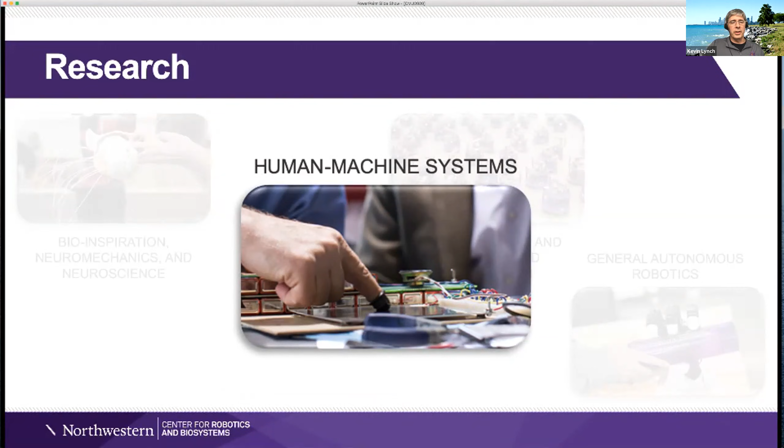So I'm going to just give you a brief flavor of some of the work that we do in collaboration with the Shirley Ryan Ability Lab, specifically in functional electrical stimulation for neuroprosthetics. So you know what a prosthetic is. It's typically a mechanical device or arm, and you attach it physically to your body and you control it either through mechanical means or some other electromechanical means.

Well, a neuroprosthetic is for somebody who doesn't need the external structure of a prosthetic arm, but has lost the capability to control it due to perhaps a spinal cord injury.

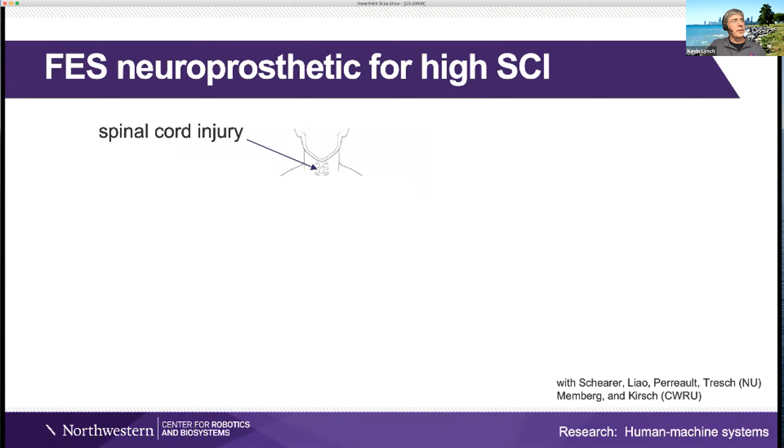So for the neuroprosthetics, what we're looking for is a way to replace the lost connection from the motor cortex to the muscles that command the motion of the arm. So if you suffered a spinal cord injury, that connection has been lost. And so what we want to do is use a brain-machine interface to basically determine the user's intent, and then also find a way to straddle that lost connection by performing a surgery.

So this is with our colleagues at Case Western Reserve University, where we implant a stimulator pack in the abdomen of the subject and use stimulators to stimulate the muscles or the nerves that go to the muscles of the shoulder and the back and the upper arm. So the idea is that the user thinks about something and their arm reaches out to accomplish the task.

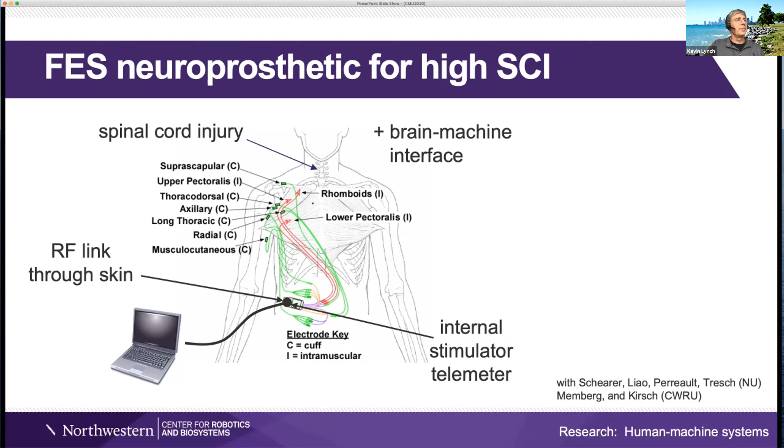So this is the experimental setup. So this is a big group working on this project. Some people were focused on the brain-machine interface. That was not my piece of it. My piece of it was on basically system ID from the muscle stimulations to the motions of the arm, and then how to use that for control.

So the experimental system we have here, the subject will be seated and connected to a robot. The robot has a force torque sensor, and we can use that robot to drive the subject's arm around and measure forces so that we can get passive arm dynamics. And then at the same time, we can stimulate the muscles and then determine how the dynamics have changed due to the added component of forces at the joints.

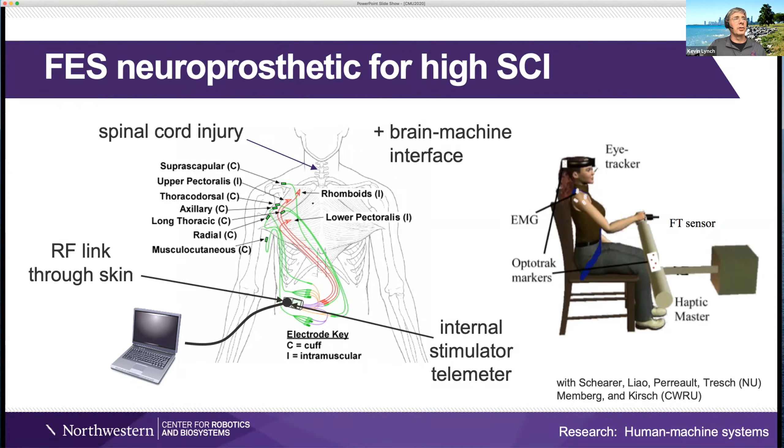So we're trying to determine a model of how stimulations create forces and torques at the joints, and then what the arm dynamics are so that we can use that for control. So I'm going to skip the details, but like I mentioned, we're trying to learn this mapping from stimulations to muscle forces. And then we're also learning a semi-parametric representation of the arm dynamics, where we have a very simple model of the rigid body dynamics of an arm.

And then we add to that basically Gaussian process models to correct for residual errors that are not captured by the model. So a low degree of freedom model so that we get 60% of the way there to the dynamics, and the Gaussian processes to correct that.

So this is a video of an experiment. So right now the subject, she's had a high spinal cord injury due to a gunshot wound. And what we're doing here is we're basically driving her arm around while also stimulating the muscles so that we can determine what the passive arm dynamics are and what the muscle contributions are. And this is just one particular trajectory that you're seeing here.

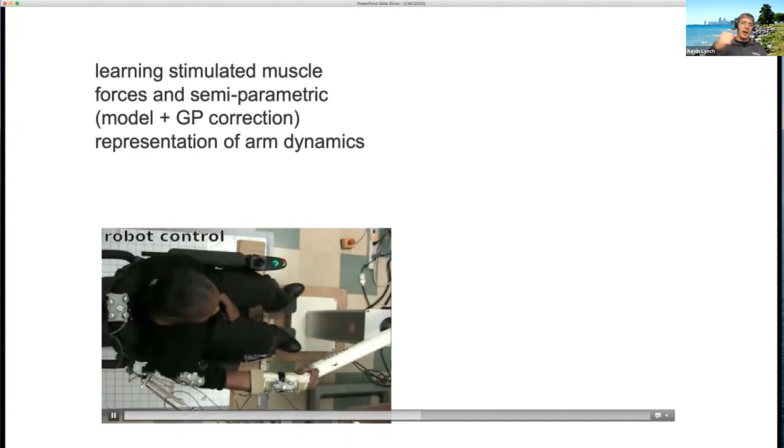After doing this, after moving the arm around in a variety of ways and stimulating the muscles, then we can build a model and we can invert that model for control. So now what's happening is we have this inverse model, we are commanding how we want the arm to move, and it's spitting back to us the stimulations that we should be applying to the muscles to cause that motion.

What's happening right here is the robot arm is in free mode, so it's not assisting in any way. It's just trying to apply zero forces. And then if we disconnect the robot arm completely, this is the motion of her arm in response to the stimulations from the model that we've built.

Okay. So this is still very crude, and there are some issues with the system. In particular, the servo update rate is only 13 hertz. So 13 times a second, we're able to sense where her arm is and then apply a new stimulation to the muscles. And that was partly chosen due to maximizing the muscle forces that we can get, and also to prevent pain, because even though she is unable to actuate her arm, she is still able to feel some pain.

So all of these things create challenges, and this is still an early result, but you can see that the model that we've learned allows her to move her arm from stretched out to close to her face for perhaps a feeding action.

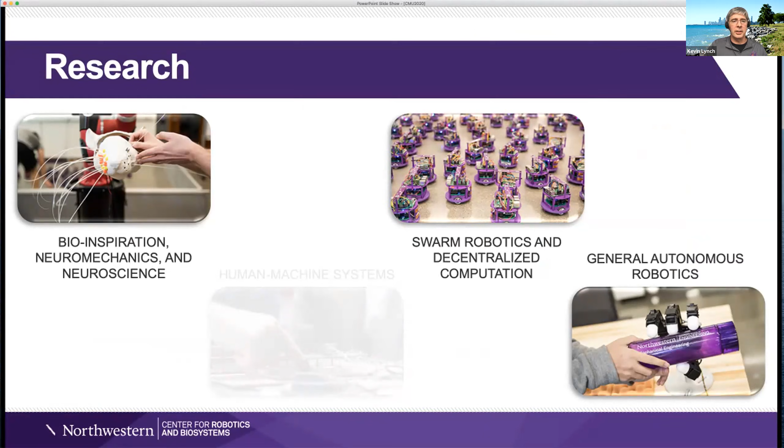Okay, so I just mentioned that as one example of our collaboration with the Shirley Ryan Ability Lab, but most of my talk today is going to be talking about robot locomotion and manipulation. So this is joint work with Dan Lynch and Paul Umbanhowar, and Dan is no relation. He's our PhD student. And here's an example of locomotion on yielding ground.

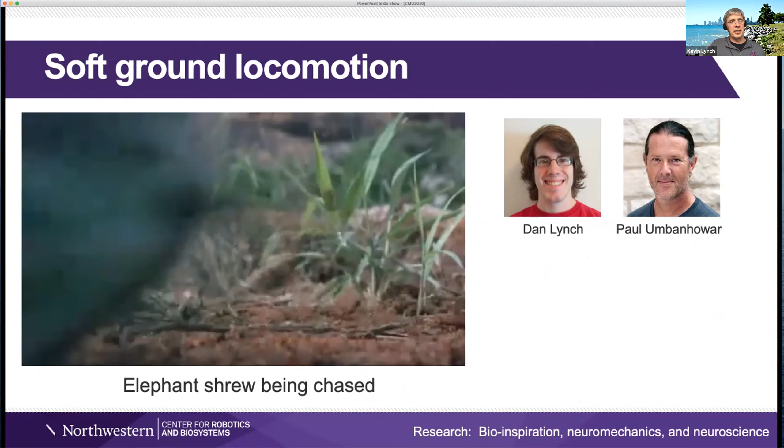So this is a rodent being chased, and you can see here as it's escaping, when it pushes on the ground, the ground gives way. So the thing that we're interested in is how can you do efficient locomotion over yielding surfaces? So here the elephant shrew is just trying to escape, so it's not worried about energy efficiency.

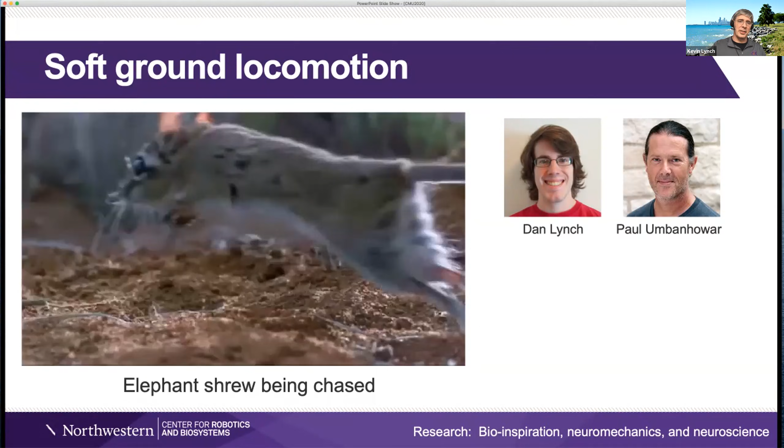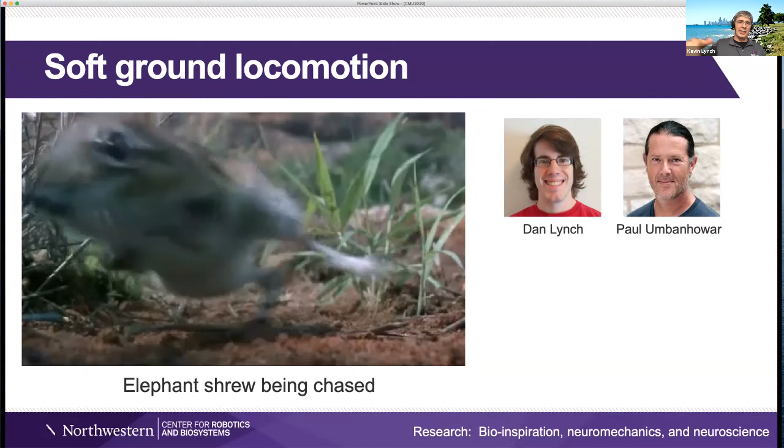But if you think about long-term locomotion over sandy surfaces, or if you think about yourself walking on the beach, if you walk down near the water where the sand is packed tight, it's much easier to walk. If you get into the loose sand, then you're using a lot more energy.

So the question of locomoting on yielding ground led us to this problem formulation that we called the soft landing problem. If you deform the ground, you're not going to get that energy back. Any of the work that you lose to pressing the ground down is not going to spring you back and be returned to you. So if you want to do efficient locomotion over soft ground, you might want to minimize the deformation that you're creating.

So an even simpler version of that is, what if you're falling into the ground? How do you control your muscles, or how do you control the robot so that your penetration into the ground is as little as possible? So we call that the soft landing problem.

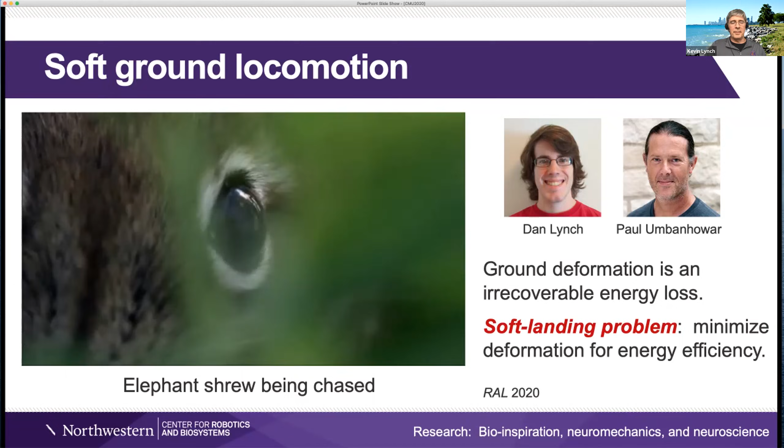So here's the very simplest test bed that we could think of to start to get at some of the fundamental questions of how to land on soft ground without wasting energy. So imagine now that you have a body that's just a mass, a foot that's a mass, and they're connected to each other by an actuator. And then they're impacting the ground, and the ground we're going to model as a one-way spring.

So basically, the deeper you press into the ground, the more force it resists you with. But once you start to lift up, the ground does not spring back. So you're basically losing all the energy it takes to compress the spring and never getting it back. This is a fairly simple model of soft ground deformation, but has been shown to represent first order effects for many typical sorts of soft grounds.

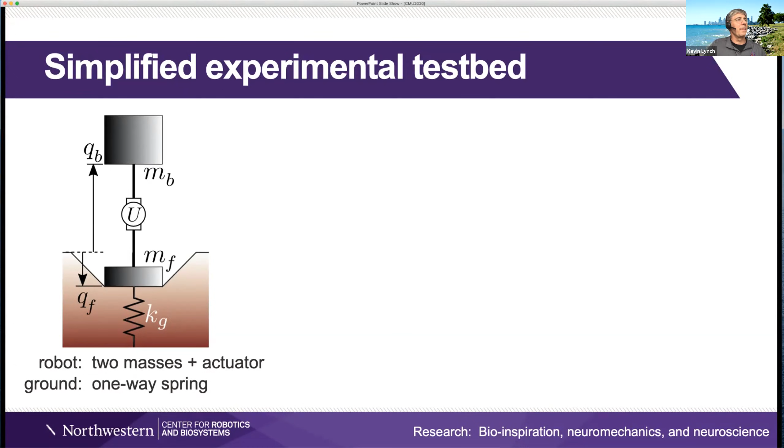So here's a picture of the experimental setup. The body is just the stator of a linear actuator, and then the linear actuator is pounding the foot into the ground. And then we mount it all on a guide rail so that we keep the motion one-dimensional. And then there's a lift mechanism so we can lift up the robot and drop it.

And this is just a video of that robot hopping. Okay, so the video that you're seeing here, you can see it's already dug itself a hole. The ground has become fairly compressed, become more like rigid ground. We're more interested in what happens when the ground is still soft.

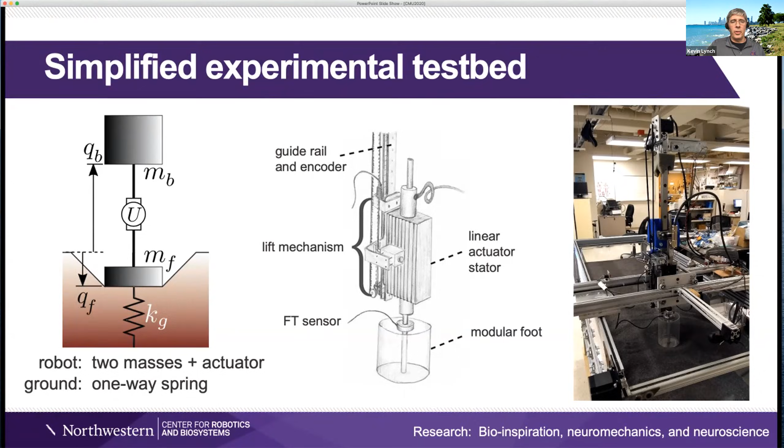Okay, and we also want to be able to control the stiffness of the ground. So for that, we have this air blower system, and let me show you here. So here the poppy seeds that are making our virtual sand are being blown from below by a fan that is blowing through a diffuser, and it creates this uplift on the sand so that it settles back very loosely.

And when the sand is packed very loosely, the stiffness of the ground is half of what it will be compared to what you saw in the previous video when it gets pounded down. So we can control the stiffness of the ground to about a factor of 2.

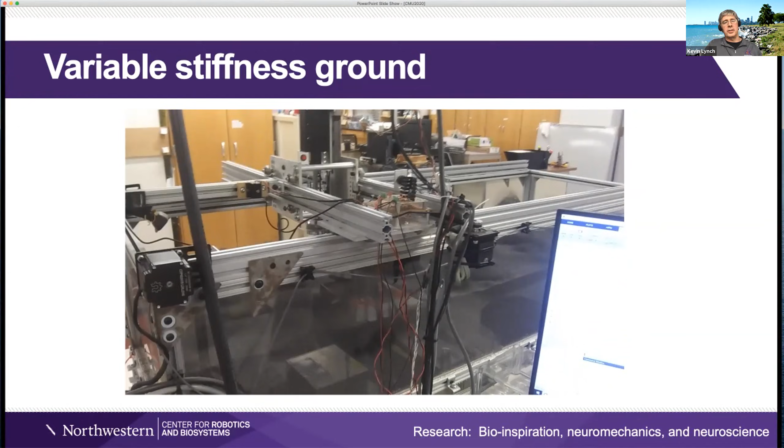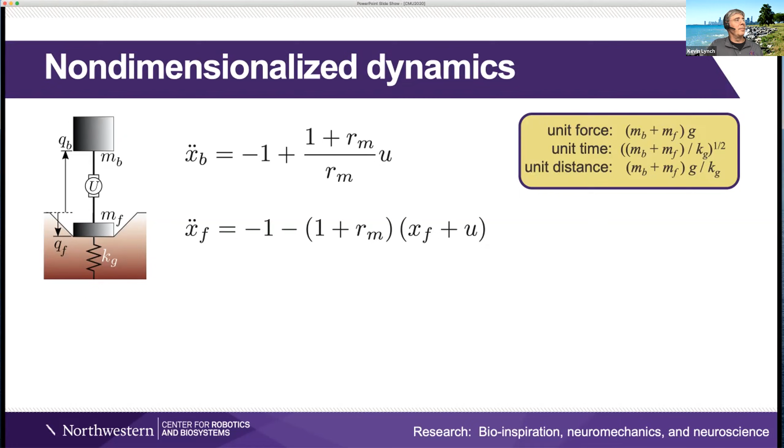Okay, so simple dynamics for this robot. We're going to define a unit force, which is just the total mass times the gravitational constant, a unit time, and a unit distance. And once we've defined these constants, the equations of motion become very simple. Right? So we have the dynamics of the body of the robot and the dynamics of the foot of the robot. U is the control force that's being applied. And the units of U are basically M times G.

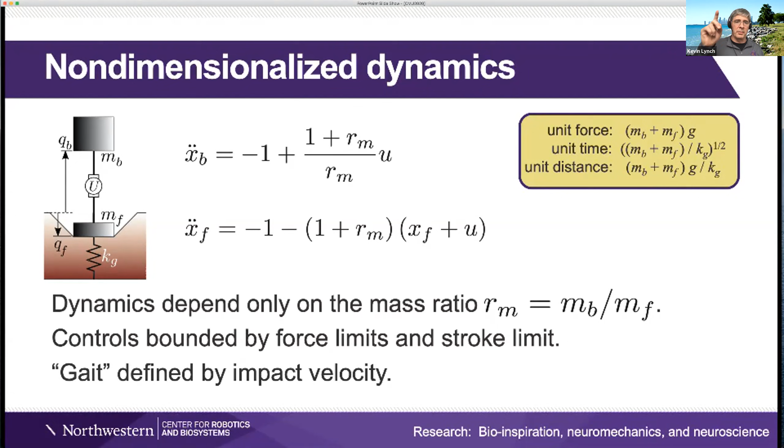So in these simplified dynamics, they only depend on the mass ratio between the body and the foot. The controls that we apply are bounded by the force limits that the actuator can apply and also the stroke limit, right? So it matters a lot how much stroke you can get out of the linear actuator when you're trying to land softly. And for us, the gait of the robot is only defined by how fast it's coming down when it hits, since it's just a one-dimensional hopper. Okay, so the problem we want to solve is how do we minimize the penetration depth subject to control and stroke bounds on the foot?

Then you lift up on the foot so that you stop its motion downwards. And then you apply a downwards force over this long period that's just the force that you need to keep the body at a stationary height above the foot. So that's it. That's the optimal thing to do if you want to minimize your penetration. Stomp into the ground to the right depth and then just sit there while you slow down the mass of the body.

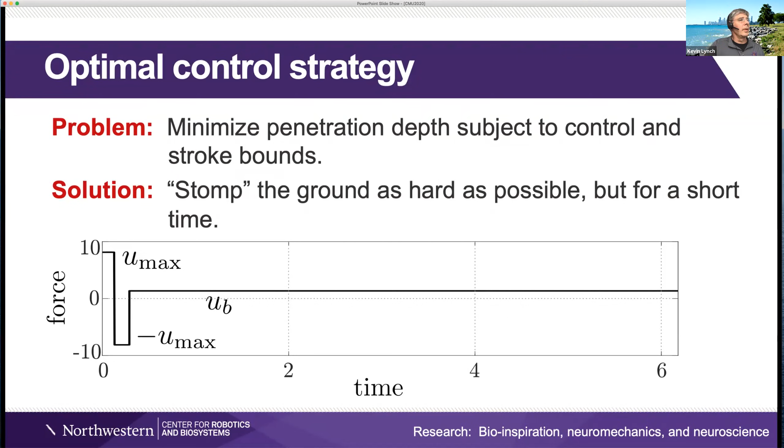All right, so good thing is we found the optimal solution. The bad thing is that if you try to use this kind of bang-bang optimal control, first of all, your control is discontinuous. You're changing the forces instantaneously. And secondly, this behavior is sensitive to initial conditions. So if you're not coming down at 5 units of velocity, but 6 units of velocity, then this kind of solution might give you bad response, bad behavior.

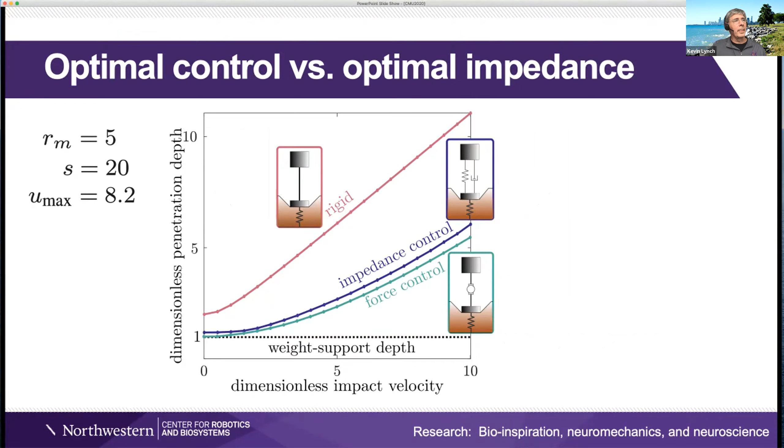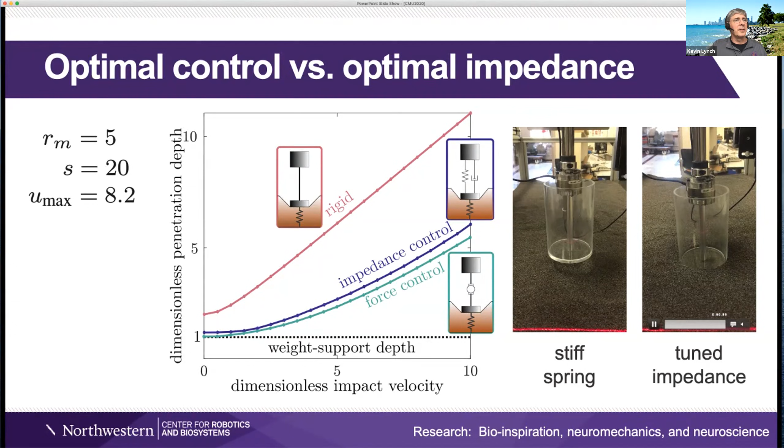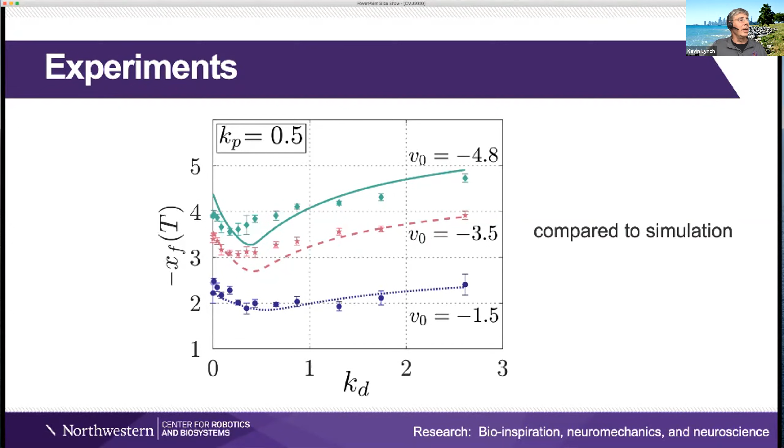Next steps for this, we've got a multi-degree of freedom quasi-direct drive hopper that we're going to be using for locomotion in the sandy testbed that I showed you earlier. So these initial experiments are about understanding how to do good impedance control and interacting with soft surfaces.

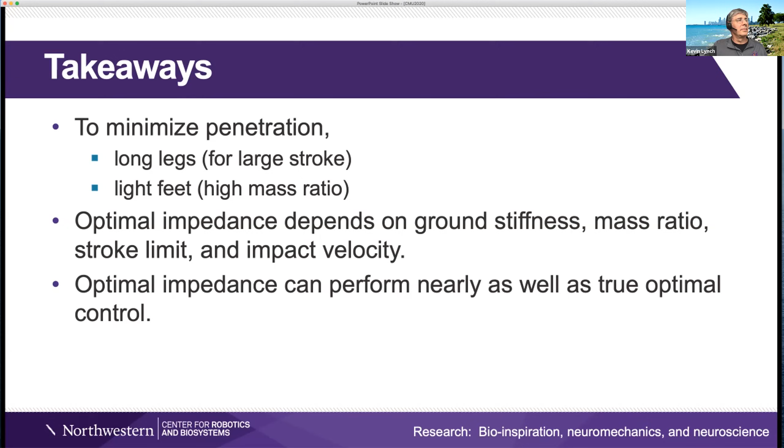Okay, so let's talk a little bit about non-prehensile manipulation, and in particular, contact juggling. So again, this is something that I learned from Matt many years ago. Contact juggling is best explained by demonstration, and I can't do it, so I'm going to show you a video.

Here's a guy in Taipei showing us how he can manipulate these crystal balls, mostly without ever grasping them. Okay, so that's why we call it non-prehensile. How to control the motion of an object without achieving a form or force closure grasp of the object.

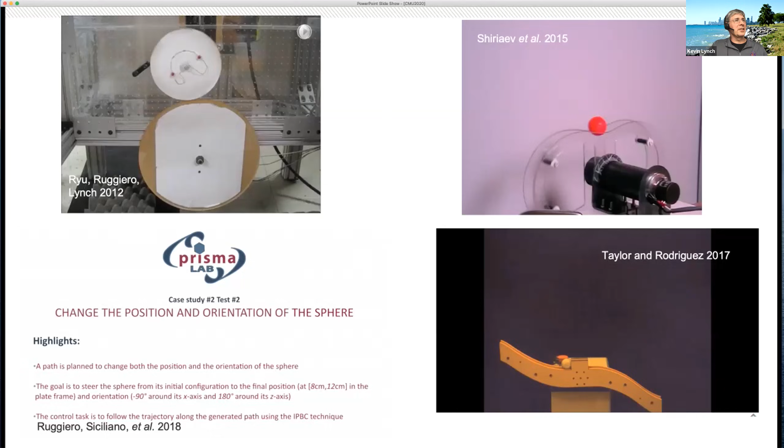So here are some examples from the robotics community. So maybe down here on the left is the only three-dimensional example you see up here. So this is some work out of Naples. And they're showing us how they can control the position and orientation of a ball on a plate by carefully rolling it along a pre-planned path. You know, the idea is, how do I get it to the right position and orientation relative to the plate?

And up here you can see some planar examples where we're controlling the motion of one disc rolling on top of another disc. Here's a ball rolling continuously around a shape. And then here's a jai-alai-like example throwing where the shape of the manipulator and its motion were co-designed to achieve the kind of throwing motion that you see here.

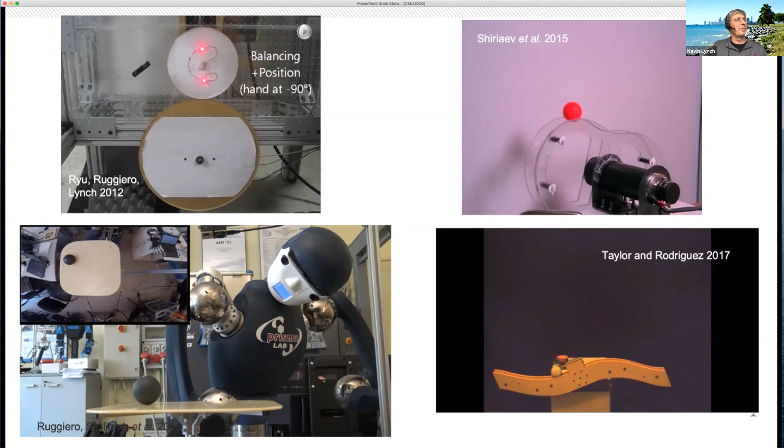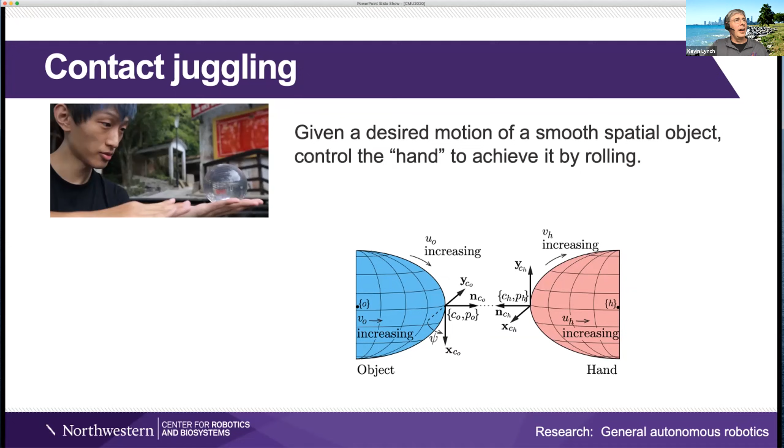So here's the question that we wanted to address with our work on contact juggling: if you're given one smooth spatial object and another smooth spatial object, and they're going to roll relative to each other, how do you control the motion of the supporting one to create the desired motion of the object that you're trying to control? And this is the work of Zack Woodruff, who just graduated a couple of months ago.

So I'm not going to get into the differential geometry of contact. Obviously we have some parameterization of the surfaces in contact, and we need to deal with the kinematics. I'll just say that to solve the problem of controlling the rolling motion of one object relative to another when they're arbitrary smooth surfaces, we need to have the first and second order kinematics. How do objects roll on top of each other?

Well, the first order kinematics have been around for a long time, since the late 80s. I would credit the work of David Montana with Roger Brockett at Harvard, although others have worked on it too. And then the second order kinematics have been around not quite as long, since the mid 90s or so. What I mean by second order kinematics is if you specify the rolling accelerations, how do the two objects move relative to each other? But early on in our work on contact juggling, we discovered that the kinematics as published were actually wrong. So one of Zack's contributions was to correct the second order kinematics of rolling.

And then beyond that, we have to think about dynamics, motion planning, and feedback stabilization. And what we found when we started our work on this was that the dynamics, motion planning, and feedback stabilization had been expressed or solved, but only for specific cases, like a ball rolling on a plane or two spheres rolling on top of each other. So part of Zack's contribution was to formulate the dynamics and the motion planning and the feedback stabilization problem for general smooth surfaces.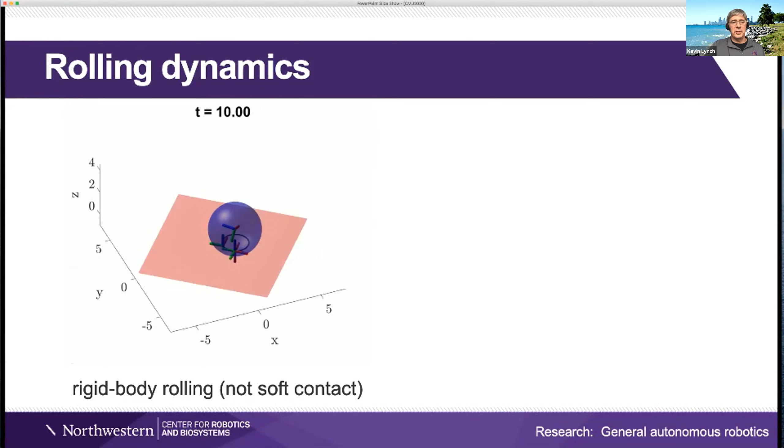So part of Zach's work was to derive the second order dynamics, and what he was able to show is that his dynamics, which find the acceleration of the ball given the motion of the plate, exactly or almost exactly predict the analytical solution to the motion of the ball. The analytical solution is these yellow dots, and in the blue is what you get from running his simulation for several turns of the plate. Whereas if you try to use another simulator like what you might get from Bullet, the ball will eventually wander off the plate due to accumulation of error. So just for the dynamics, one of Zach's contributions was to write them exactly for the instantaneous case for second order systems.

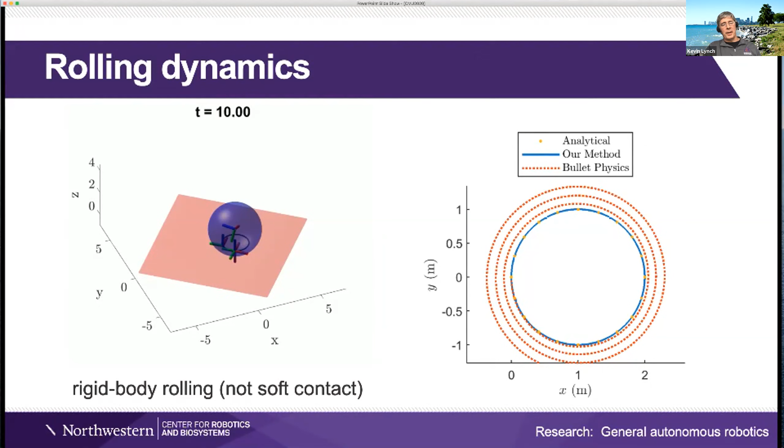The next problem was doing motion planning and control. And I won't say a lot about it, except that Zach spent a fair amount of time figuring out how to use nonlinear optimization so that when you apply it to these rolling problems, contact juggling problems, they will reliably find solutions. Any of you who've used nonlinear optimization before know that you can get stuck in local minima in the solution space. So Zach figured out a way to use iterative refinement, where basically you're continually refining the trajectory of the hand so that over time you better and better satisfy the dynamics. And with that method, he's able to usually find solutions to contact juggling problems. And then for feedback control, there's not a lot new there, just a linear quadratic regulator with time varying gains to stabilize the trajectory.

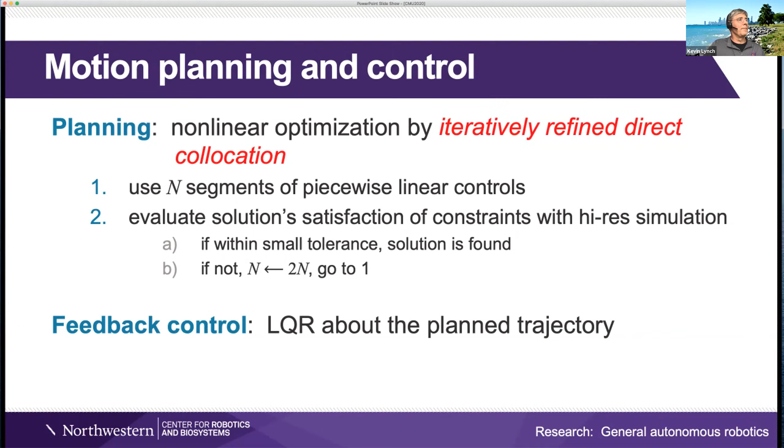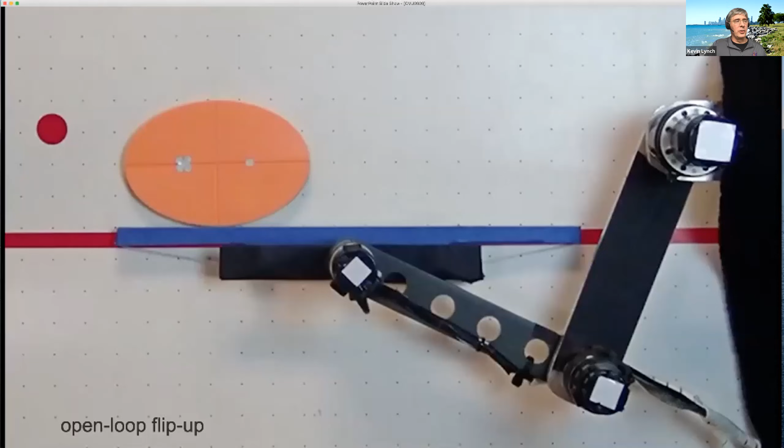What Zach asked is, can we do that more efficiently? And so what he was able to show is that his motion planning method automatically comes up with a solution like the one you see here. Now that's without control, though. That's just an open loop motion plan. So here's Zach trying to apply that now to a two-dimensional problem where he wants to flip up this ellipse from its stable equilibrium to an unstable equilibrium.

And because of modeling errors and control errors, obviously it doesn't just come to a stop at the unstable equilibrium. So now you apply feedback control to try to correct for modeling and control errors. And this is kind of a first simple example.

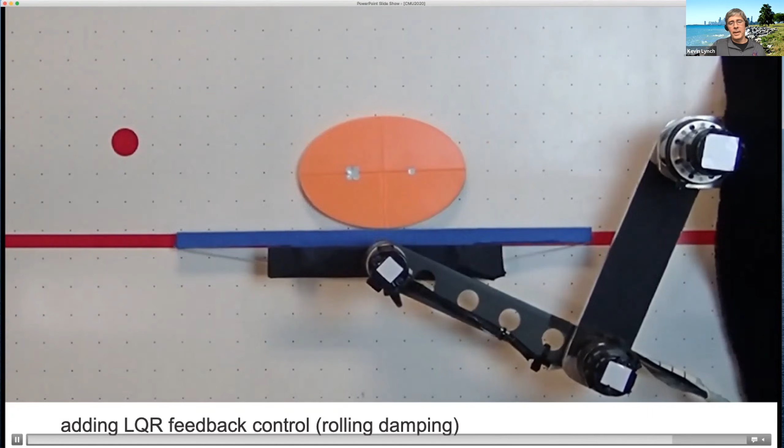Here you can see what the ellipse will do if you don't apply any control. And now the problem is to damp out any rolling motion. So here there's a vision system that's looking at these markers on the ellipse. And as he disturbs the ellipse, the hand is just moving to prevent rolling between the two of them. Okay, so that was kind of a first experiment to see that we could do feedback control to stabilize, in this case, a particular equilibrium.

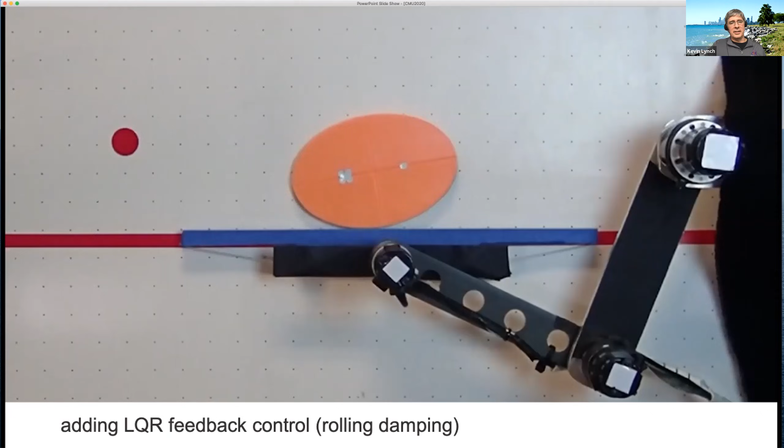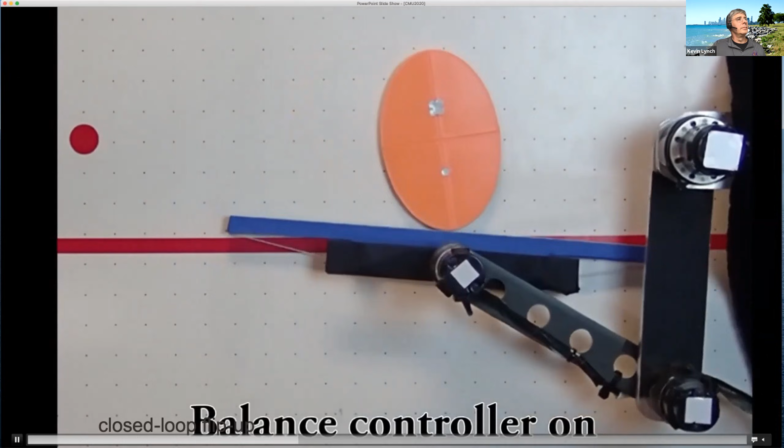And then he applied it to make that flip up problem a closed loop problem. So here, basically, he's rolling up the ellipse, and then when it gets close to the unstable equilibrium, he turns on a second controller. The first controller is just tracking the trajectory, and the second controller is just stabilizing the unstable equilibrium. This is the same thing, performed 12 times, and you can see that the behavior is quite consistent.

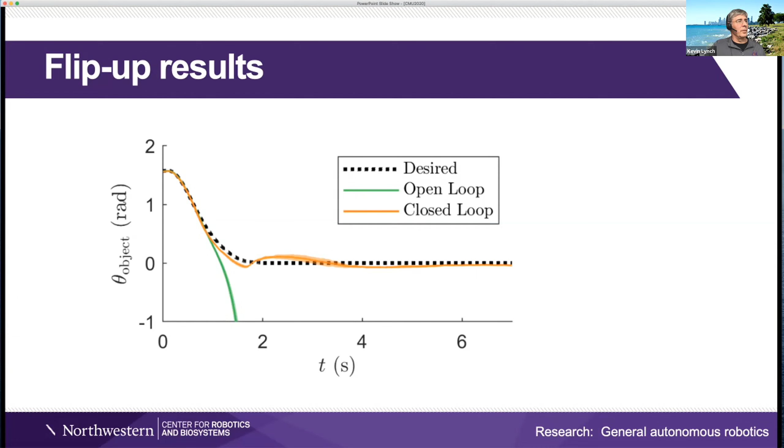Just another example of using the motion planning and control. So here the plan was to take the ellipse to a state whereby its free flight motion would cause it to bounce on the manipulator at the catch position and then stabilize it at the upright configuration. I'll show it one more time.

Okay, so that's the contact juggling story. So Zach did the three-dimensional kinematics, dynamics, motion planning, and control, and then his experiments were all in 2 dimensions, like you saw there. I want to move on to our recent work in grasping manipulation.

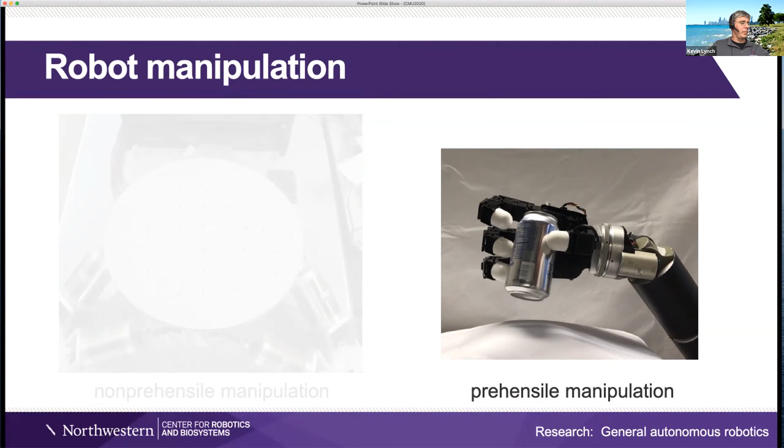And any of you who've ever used chopsticks before have probably picked them up where the ends of the chopsticks are misaligned, and you might use a plate or something else, push them against the plate, get them in alignment, and now they're much more convenient for use. So here's a picture of that. So what do you do? You move your hands, you put the chopsticks against some contact constraint, move your hand, and the contact constraints help you perform the alignment. So we call this in-hand sliding regrasp.

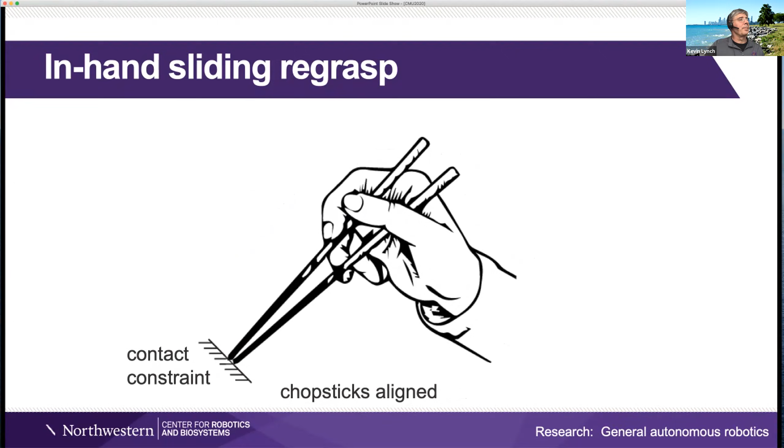The problem here is to use external constraints to help you achieve a regrasp of an object by sliding at the contacts. And to model this, we are going to treat the contacts as essentially contact points that are mounted to a position-controlled finger anchor by a multidimensional spring. Okay, so what you see here is the fingertip at its nominal configuration if no forces were applied to it. Here it is at a displaced configuration due to forces, and the force that it's applying to the object that it's grasping lives somewhere inside this friction cone due to the Coulomb friction assumption.

Okay, so we call this spring sliding compliance because the spring compliance is what we're used to. You apply force and the spring complies, and this is important for when you're doing sliding grasping over smooth objects, that you have some kind of spring-like behavior to maintain the contact. And we call it sliding compliance because there's a non-linear relationship now between the sliding motion of the finger and the forces that it applies to the object. So one is kind of a non-linear velocity compliance, the other is a spring.

So here's an example. So this is an Allegro robot hand, and what we're going to try to do in this example is move the fingers from this location to a different grasp location where the fingers are down here. And we're going to do that by moving these position-controlled finger anchors, which are compliantly connected to the fingertips. And while we do that, we want to ensure quasi-static balance of the object so it doesn't fall over.

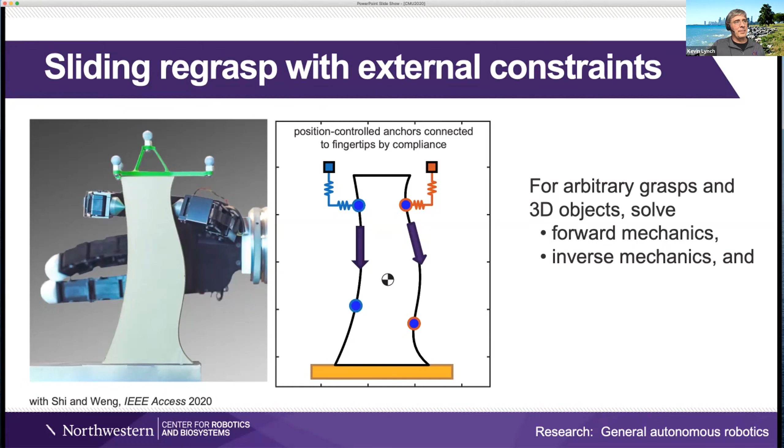Okay, so to do this, we ask the question, okay, for any set of grasp contacts on any smooth 3D object, we need to know the forward mechanics, which is if as I move the finger anchors, how do the fingertips move over the object? The inverse mechanics, which says that if I want the fingertips to slide in a certain way, how do I move the finger anchors? And then finally, to use that information to plan a regrasp to accomplish the kind of task like you see here.

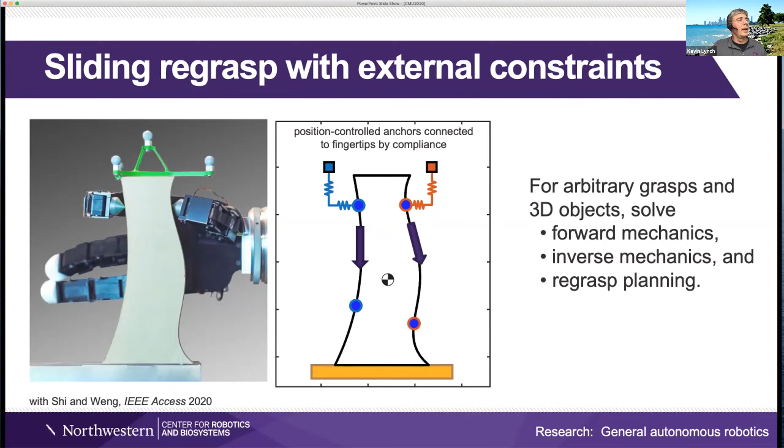So I'm not going to talk a lot about the detailed mechanics. I just want to give this picture here because it kind of explains the main ideas. So imagine that you've got a fingertip in contact with a flat surface, and I'm drawing this, essentially this friction cone. So if I assume that the stiffness that's connecting this anchor to the fingertip is the identity matrix scaled by something, then I can just take the friction cone as it would be drawn here and raise it up.

And this tells me that if the anchor is anywhere inside the cone, then the fingertip is going to stick to the surface. If I lift the anchor above the cone, then the fingertip is going to lift off. And if I move the anchor over to the edge of the cone, then the fingertip is going to slide. Okay. So in this case, the inverse mechanics problem we want to solve is, okay, if I want the fingertip to move to the left, how should I move the finger anchor?

Well, first of all, it has to be on the edge of the cone. Otherwise, we have to first get it to the edge of the cone. And then once it's at the edge of the cone, we have a choice of how to move it. So there's a general solution that tells us, okay, if we move in this direction, we can slide the fingertip as specified here. But I can also add a component to the finger anchor motion that lives in this null space, where it doesn't affect the motion of the fingertip, but it does affect the contact force. Okay, so that just gives us extra freedoms in how we design a regrasp.

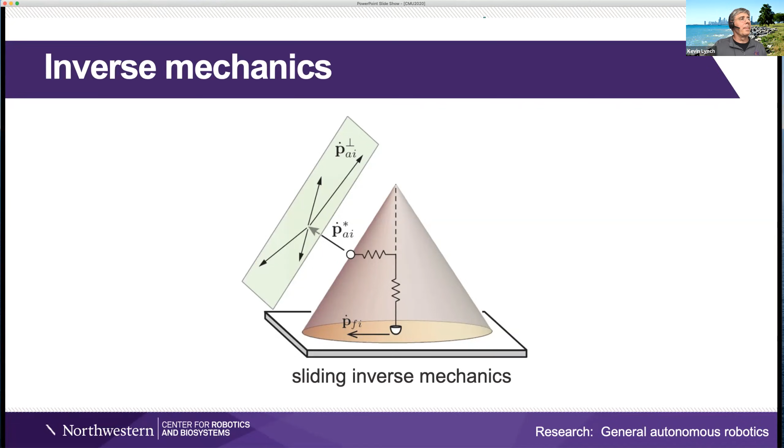So now we have the mechanics that describe how fingers slide over the object, and leaving out all the details, those become constraints to the motion planning problem. The motion planning problem is, how do you move the anchors of the fingers so that the fingertips slide where you want them to go, all the while maintaining a quasi-static balance. And I'm going to skip the methods for solving that for this specific example. The exact solution method you use depends on the kind of hand you have or the task. It's the constraints that are the real contribution of this work. These are the constraints you need to satisfy. But let me show you for this example the solution.

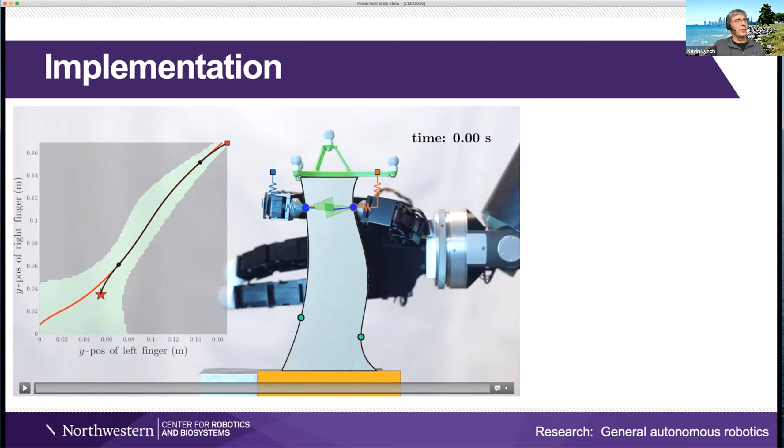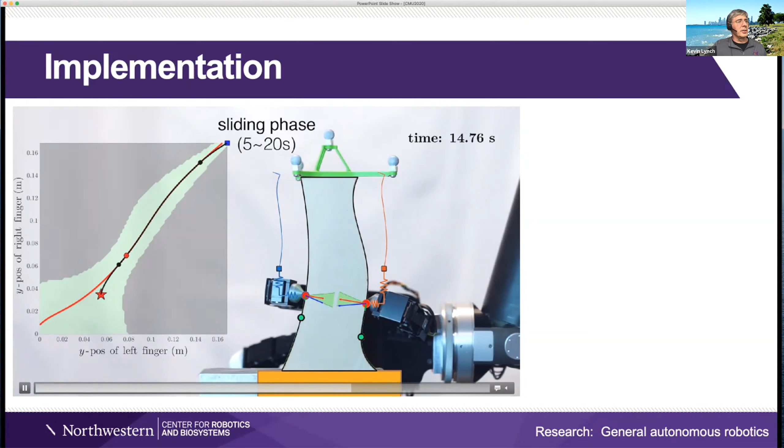First, the finger anchors are going to move so that the forces currently being applied by the fingertips are on the edges of the friction cone. And then the fingers will begin sliding downwards in response to the motion of these anchors. So you can see the virtual anchors of the fingers are here. So here the forces are moving to the edge of the friction cone. And now, as we slide these anchors down, the fingertips slide, you can see the predicted forces indicated in blue here. And those are being balanced by the gravity forces and the forces due to the contacts at the bottom. Okay, so this is a very simple example of a regrasp made possible by our understanding of spring sliding compliance.

But to do this, we needed to implement compliance control on the fingertips of our Allegro robot hand. So it's a nice robot hand. It's got 4 fingers and lots of degrees of freedom, but they're very highly geared joints. And doing something like force control or compliance control is not easy when you have these kind of stiff joints with a lot of friction in the transmissions. So what we wanted, to be able to do this kind of manipulation more naturally, is we'd like to have fingertips where we know what the compliance is, so that we don't have to rely on poor compliance control behaviors from the robot hand.

Contact point detection: we'd like to know where the contacts are happening on the fingertips. We'd like to be able to measure the forces, but more generally the wrenches being applied through the fingertips. And we'd like these fingertips to be low cost. So the fingertips we're using here are just 3D printed cones. What we'd like to do is put tactile sensors on there so that we can control this kind of manipulation more naturally. We do have SynTouch tactile sensors, very expensive, more than $5,000 each when we bought them. And they actually don't work very well for either contact location or wrench measurement, which are 2 things that we want.

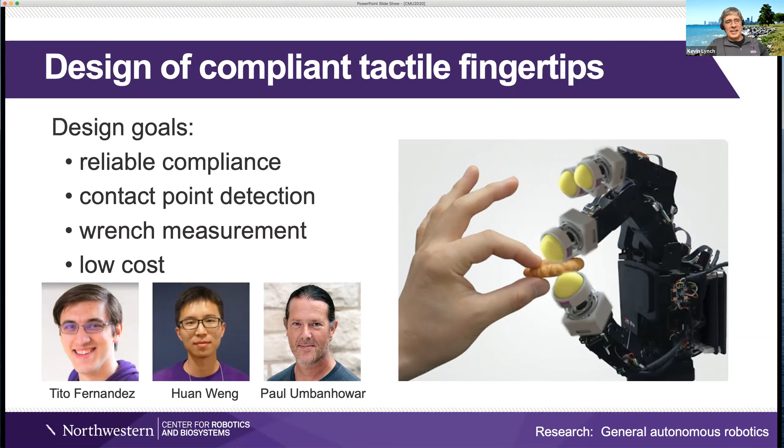We wanted to be able to detect the contact location. We want to be able to detect the wrench being transmitted, and we wanted low cost. And this is work with my students, Tito and Huan, and Paul Umbanhowar, my collaborator. So this is the design of our tactile sensor. Basically, it's got 3 parts.

It's got a base, and in that base is a camera. It's got a fingertip, and between the 2 is a flexure. And in the picture over here, the flexure is just a simple compression spring. The subtitle for this sensor, which is called the Visiflex, is yet another optical tactile sensor. And there's quite a few out there, and we'll talk about them in a minute. But let me just explain how that works generally.

You've got a camera looking up from below. You've got an acrylic dome here with light being infused inside of it. The light is totally internally reflected unless there's contact at the cap, in which case there's light scattered back towards the camera. We pick it up as a contact location. And this LED board also has downward facing fiducials, and we track those to detect the displacement of the dome. The camera down here is operating at 60 Hertz and 1600 by 1200 resolution. And that's an image of the current prototype.

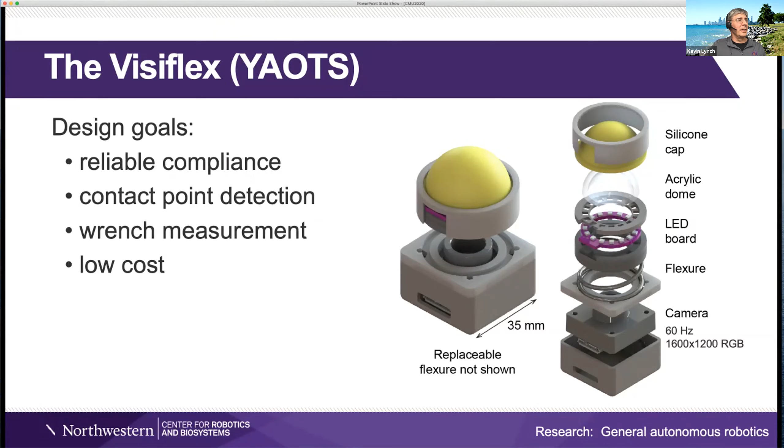So there's a lot of optical tactile fingertips. And the first one I used was way back in 1992, a waveguide sensor that also used frustrated total internal reflection for determining the contact location on a fingertip. And then there's also this work that created the OptoForce force sensor, where LEDs and photodiodes were used to detect basically how much force is being applied to a fingertip by pushing on it. So basically the deflection of the LED light created a signal in the photodiodes, and you interpret that as a force.

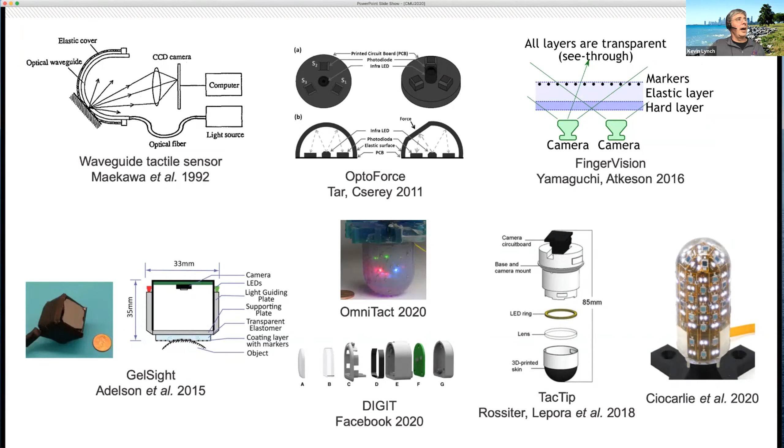Other optical tactile sensors include FingerVision there at Carnegie Mellon, GelSight from MIT, lots of follow-up work to that, and the TacTip. All of these have different capabilities. The thing that ours was designed for is to give us the wrench. None of these are very good at providing a 6 degree of freedom wrench. To give us the contact location, and also to provide compliance, reliable compliance for reliable manipulation. So I would say that our work is probably most closely inspired by these two pieces of work.

So just to give you an idea how it works, here's the view of the camera from the bottom. Here's a reconstruction over there. As we displace the dome, we're tracking these fiducials, and that motion of the dome that you see reconstructed over here, along with the known stiffness of the flexure, allows us to determine the wrench that's being applied. We get the 6 degree of freedom displacement of the dome by tracking these 8 fiducials.

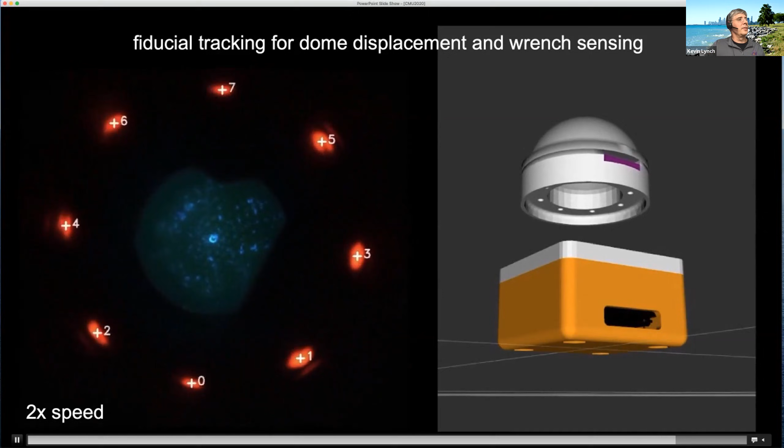This is showing contact location sensing. So, you know, pushing on it here, you get a bright spot appearing in the camera over there that gets turned into a reconstruction of the contact location over there. Flexure design is something that we spend a lot of time on, but for the purposes of this talk, we're going to treat it just as a simple compression spring. And I'm going to skip through all of this.

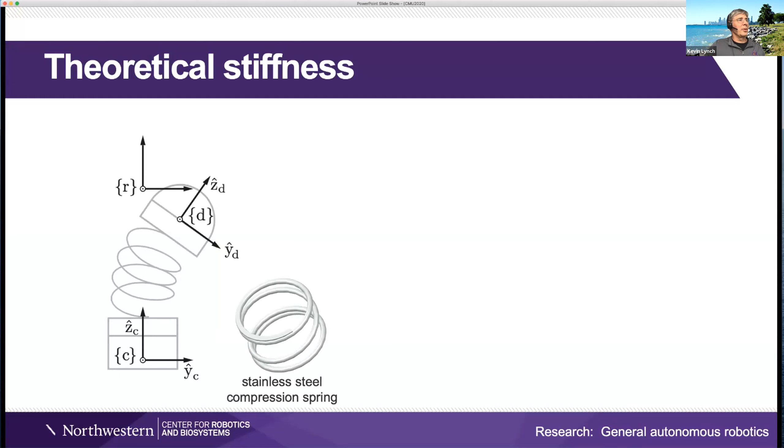But basically, we've designed our flexure for the first prototype of this sensor to give us about 10 newtons of force at about 2.5 millimeters of displacement in the Z direction of the sensor. And the reason for that is that our Allegro hand is capable of producing about 10 newtons of force at the fingertips, and 2.5 millimeters of displacement is a reasonable displacement for a fingertip the size of ours.

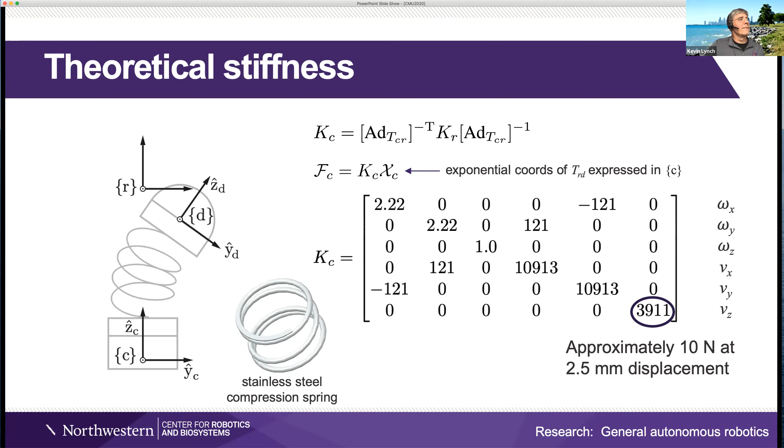So to test the sensor, we mounted it in this very precise 5 degree of freedom motion stage. It can deflect with a repeatability of less than a micron and less than 0.001 degrees. So this testing stage is moving the dome around. It's telling us what the actual displacement of the dome is. The vision system is reporting what it thinks the displacement of the dome is, and now we can compare how much error there is in the vision and also how much there is in the wrench sensing due to the force torque sensor we have.

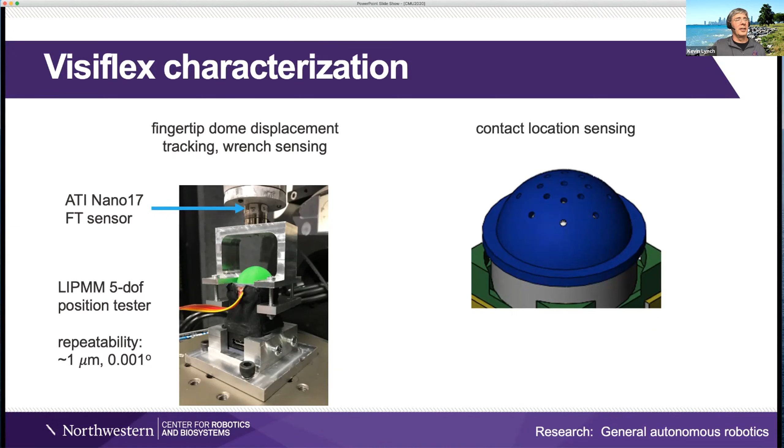And then for contact location sensing, we're basically putting a rigid cap over the dome and then pushing on it. And we know where the holes are in the dome, so we know where the contacts should be. So these experimental results basically show us that the contact locations we pick up with the camera are pretty close to the actual locations, less than a millimeter of location error, and the repeatability is very high, 0.1 millimeters.

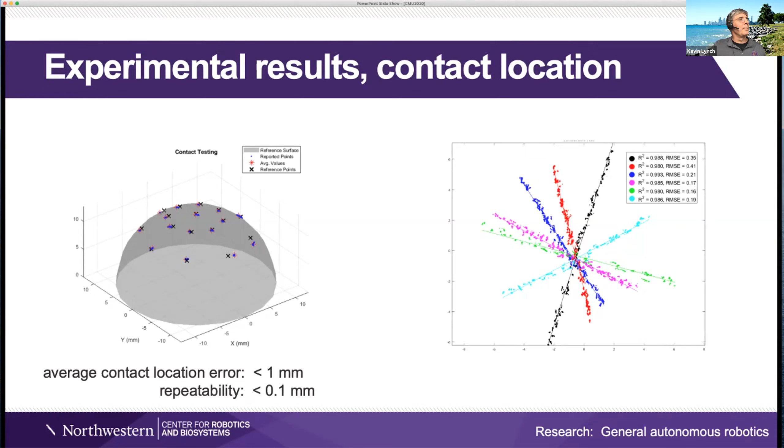And then this is a different test where we applied contacts on a line over the dome and showed that all the contacts do lie along lines with very high R squared. And then for wrench sensing, basically our resulting wrench error. So we're comparing what the Visiflex tells us the force should be compared to what the ATI Nano 17 is telling us. And we get a typical wrench sensing error of about 0.1 newtons over a range of 10 newtons, so about 1 part in 100. And then 50 newton millimeters for torque.

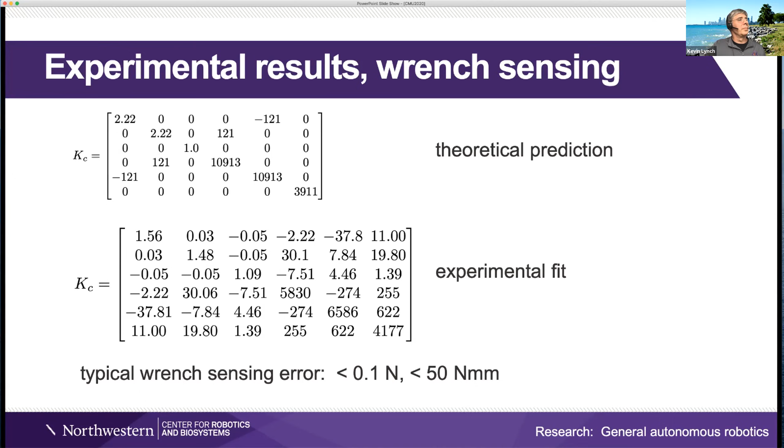So that is the Visiflex. The next thing we're going to do with it is actually do some in-hand manipulation. As of right now, the sensor is just being completed and tested in the lab.